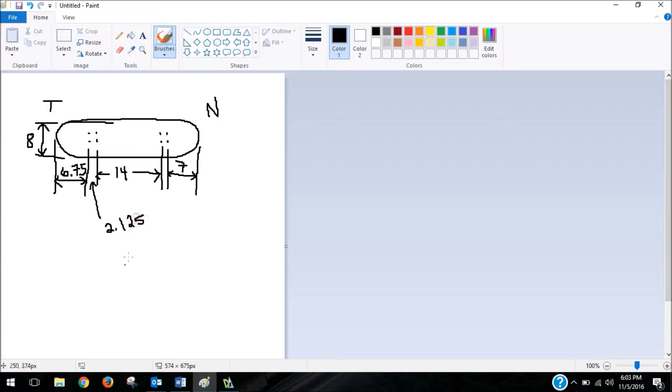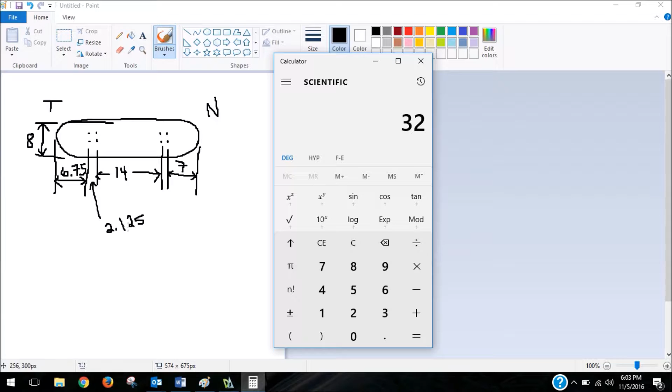2.125. Then I'm going to pull up a calculator and add up 6.75 plus 2.125 plus 14 plus another 2.125 for the other distance between my bolt holes, and finally 7, and it is a very nice number - it is 32 inches long. I'm going to write that down, 32 inches. So our rectangle is going to be 32 by 8 inches.

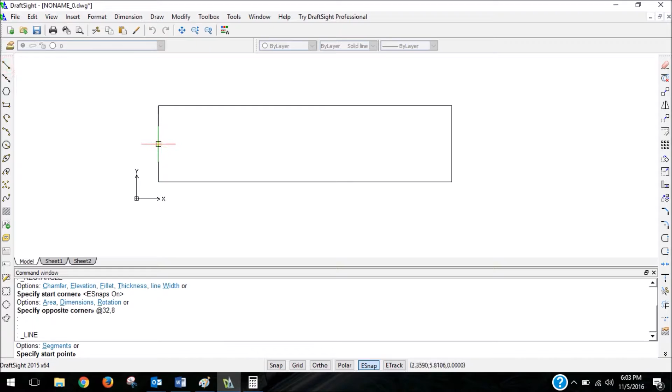Next, I'm going to draw two lines, one that cuts it in half this direction. Actually, I'm only going to draw that one line. I'm not going to draw the second line just yet.

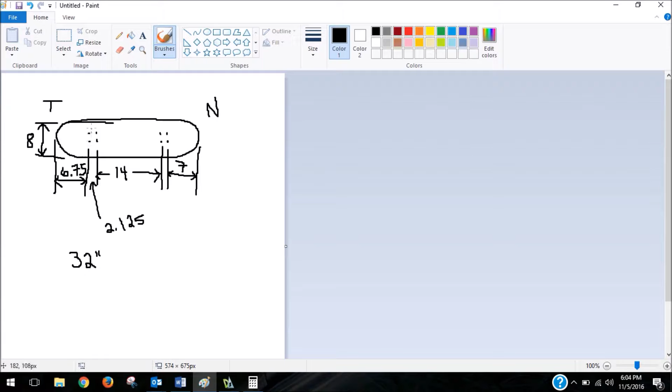So the next thing I'm going to do is draw my nose and my tail line. I have a little T here on the left indicating that my tail is the left side of the board, and an N here on the right indicating that this side is the nose. So if I have a rectangle around this whole thing, I'm going to make a line 6.75 inches away from the left side and 7 inches from the right side.

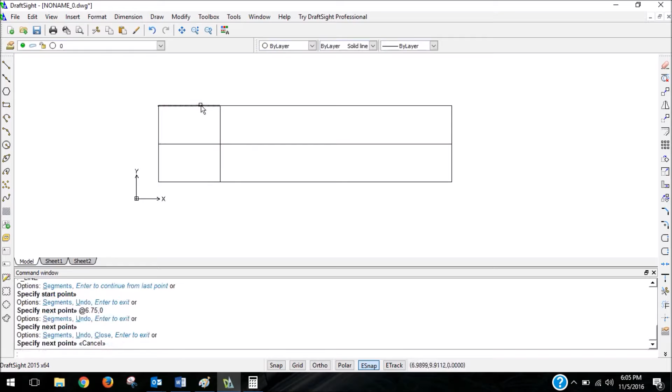So if you notice, the way I got a point that was 6.75 inches away is I drew a line, which I'll later delete, that happened to get me from this point to the point I needed to be at. So I can just click here and delete.

Now the other cool thing that we can do is we only have to worry about drawing half of our skateboard. So from this point, I'm just going to draw in the top half of the large first rectangle I drew, and then later on, once we're done, we're going to mirror it across that middle line I drew.

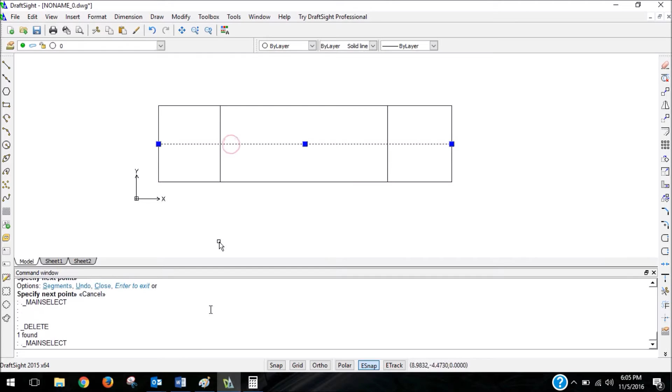Let me go ahead and place my bolt holes now. For this, I'm going to draw some lines, and all these lines I'm drawing that are going to later be deleted, I'll refer to this as reference geometry because it's basically geometry we create in order to create the features we really care about.

And I forgot what the width was, so I have to go and look that up. Oh no, I didn't - okay, it's 1.62. So the width that we're going to be coming up here of our wheelbase, I haven't drawn that on here either, but we happen to know that from the top set of bolt holes to the bottom set of bolt holes is 1.625.

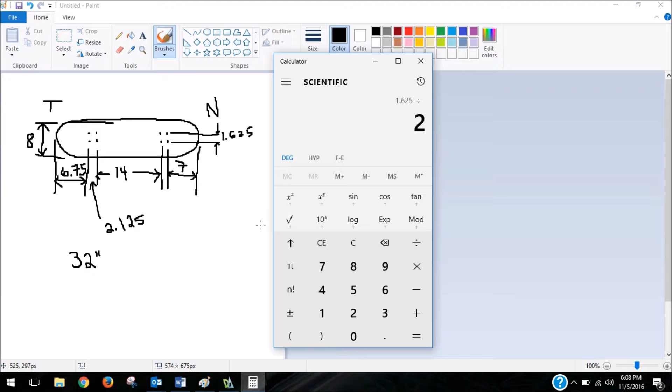So in order to make this feature, we need to then divide that. So 1.625 divided by 2 - we have to half it because our line's going to be coming from the midpoint of those two bolt holes - gives us 0.8125.

So we're going to come 0.8125 up. Oops, so I forgot to put the little @ sign, so we went off to the absolute coordinate, not the relative coordinate.

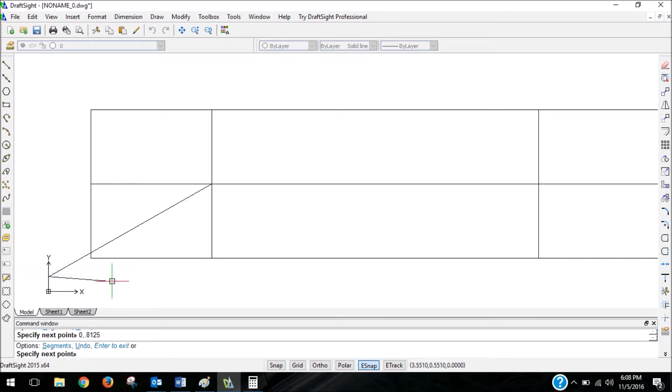Alright, and again, if it's not clear why we didn't go up 1.625 here right now, you'll see that later - when we mirror the board, there's going to be another 0.8125 gap, and when we add those two 0.8125 distances together, we get the 1.625 that we're really looking for.

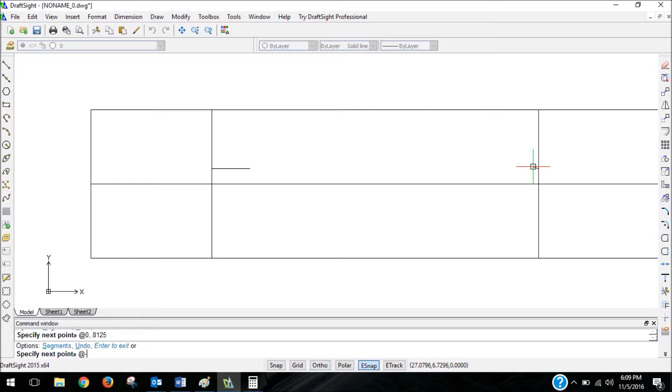I'm going to go over 2.125, and I'm going to do the same thing on this side. And I can position my bolt holes now - these are each 3/16 of an inch in diameter.

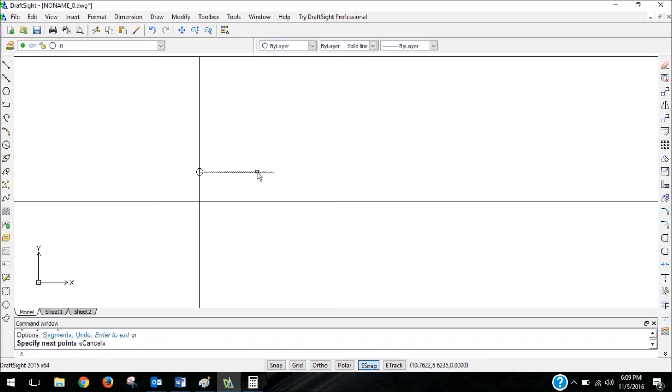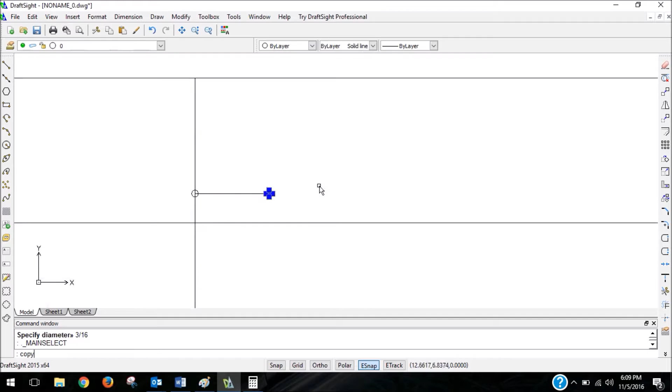And another quick thing we could do is copy paste. So you might not have seen that trick yet. If we just type in copy and I have my item I'd like to copy selected, hit enter. You specify where you're copying it from and where you're going to copy it to.

So if I click the center of my circle as the start point, it's going to basically drag my circle from the center point, and I can position it at these 2 points. And then hit escape. Next, I can delete the reference geometry that I originally had there. So all these little lines.

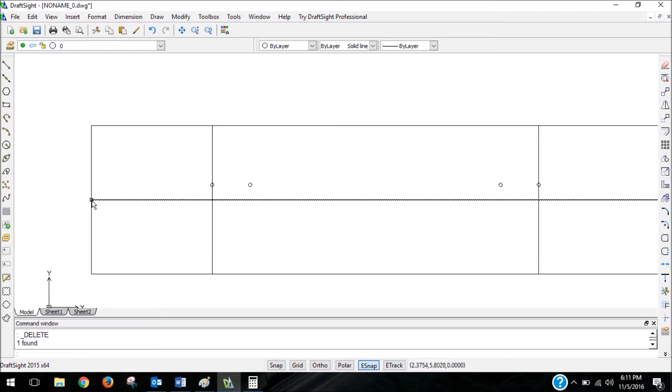And next we just have to make our curves. So just the curved portion of our board, and I'm going to use the spline tool for this. The other important thing is to decide where you want this curve to start and end. It's definitely going to start or end at the point right here, at the midpoint of the left side and the midpoint of the right side for each of our curves.

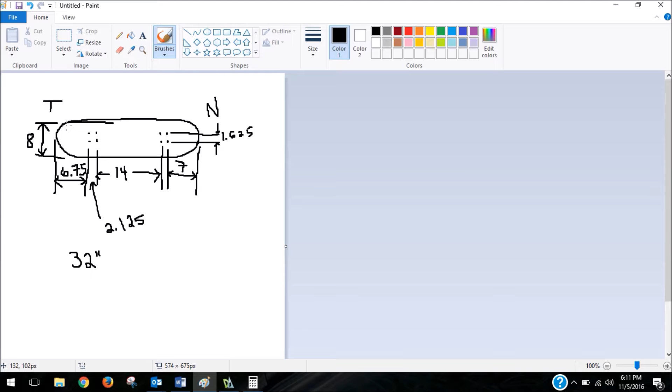But the key is, where do we want this curve to start? And for my case, I'm going to start my curve actually in line with the outer bolt hole in each scenario here. Sometimes you might want to bring the curve in further or have a shorter, more compressed curve. But for right now, I think that putting it at the nose and tail length would be a great spot.

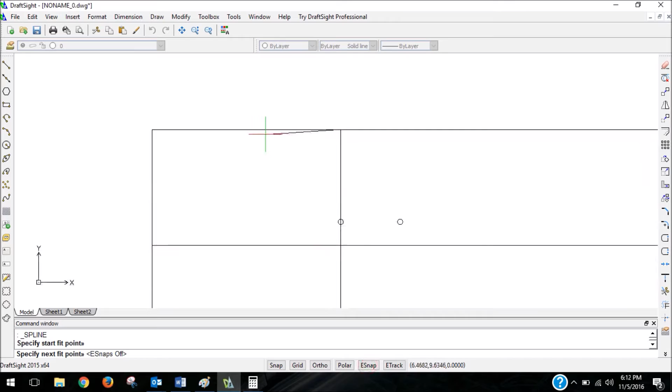So I'm going to put it here to start. I'm going to take off my snap, and I'm going to put down 3 points. And I'm going to change these in a little bit. And I'm going to turn my snap back on and get back to this midpoint. I am going to hit enter to start the tangency.

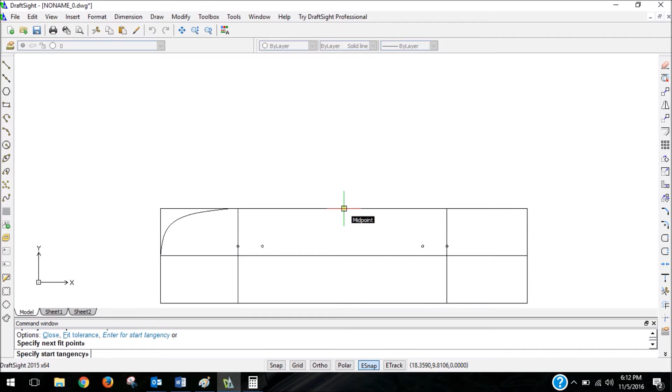And again, if you don't remember how the spline tool works, you could watch the video about creating splines and get some more practice with that before you start making the end of your board. And the start tangency is going to be along the horizontal plane there. And then this is going to be along the vertical axis from this point.

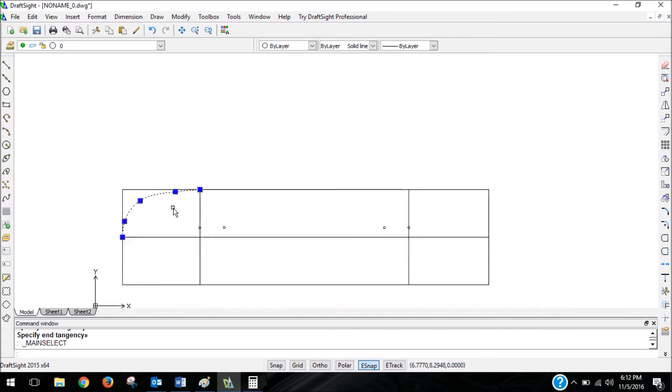So that actually doesn't look like that bad of a shape. Play around with it a little bit. And again, turn off the snap to play around with it. Alright, let's start with that. Now I'm going to make another spline on the other side. And again, we're just making half of the spline because we're going to mirror this geometry onto the other half of the rectangle.

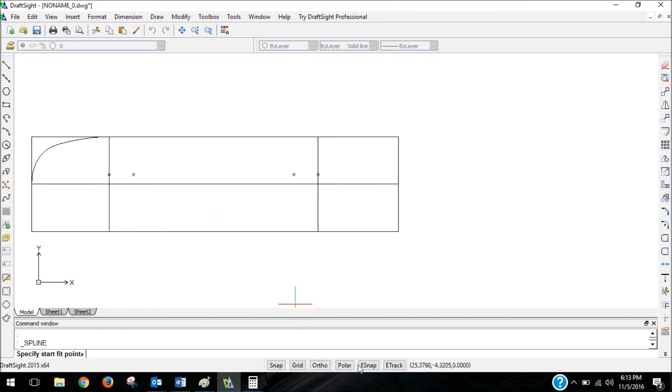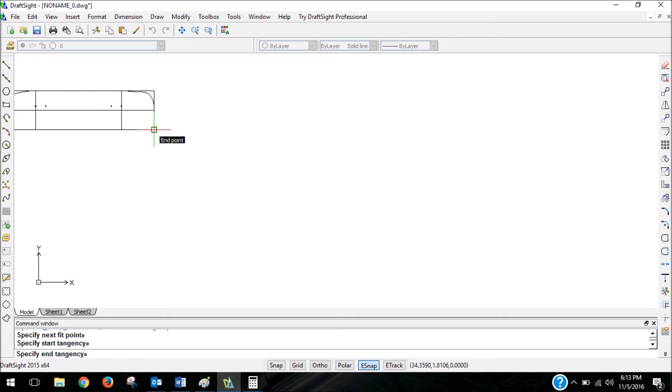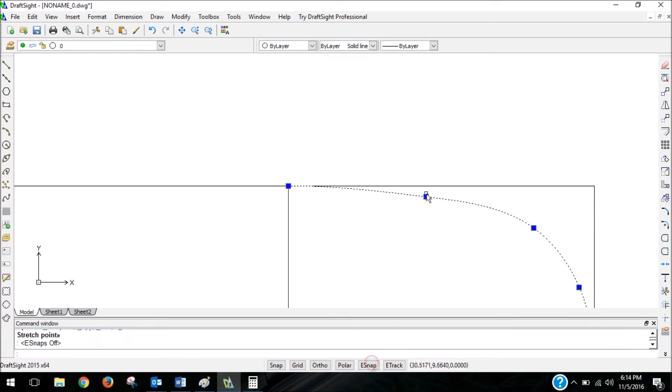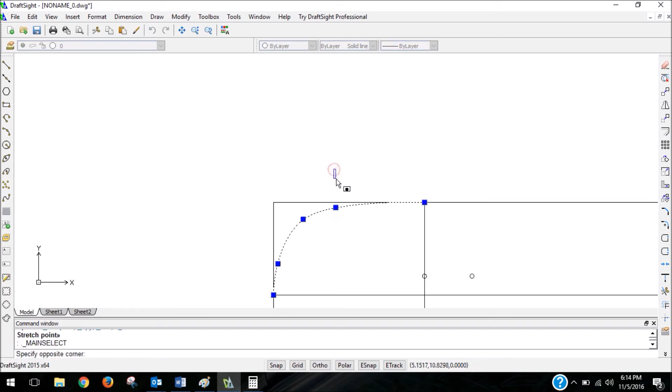And I'm going to follow the same tangencies, both horizontal and vertical. Alright, let me adjust this one a little bit more. Alright, that looks good enough for now for this example.

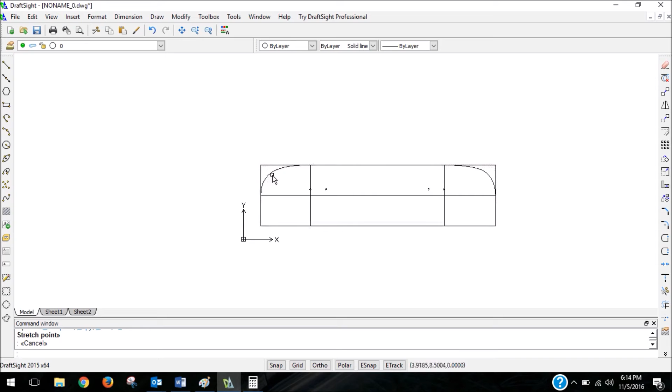So what we can do is select, first let's clean it up and get rid of some of this geometry. So I can delete a bunch of things by clicking and forming one of these selection boxes, coming from the right to the left, and that forms that green box. Notice if I go the other direction it turns blue. Anything that touches this green box or is inside of it will get deleted. The blue is anything that's completely enclosed in the box gets deleted.

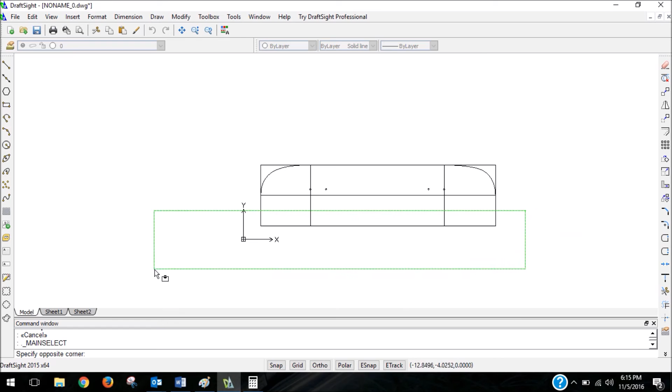So this is just going to select all the lines that pass through this, which I can delete. And it deleted part of our board. I'll just create a new line to replace that missing line. And now I can create a box that will select everything, and then I'm going to deselect this horizontal line. The way I do that is I hold down Shift and click on that line.

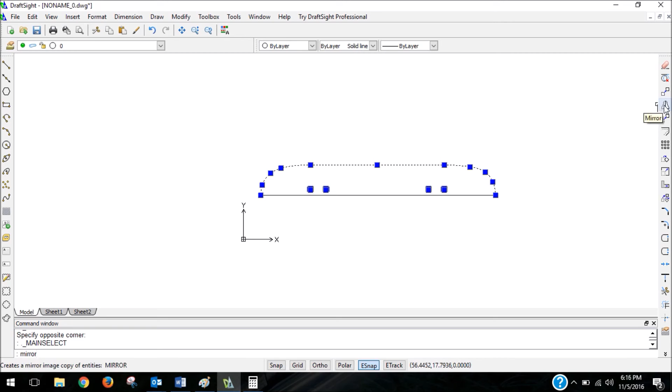That will deselect it. I'm going to type in mirror. There's also a little icon off to the side here on the right side for mirroring. I'm used to typing this in. Hit enter, and it's going to ask us to define our mirror axis. So the axis is defined by a line that we create, and that line happens to be this horizontal line. So we just choose the start point and the end point of that line.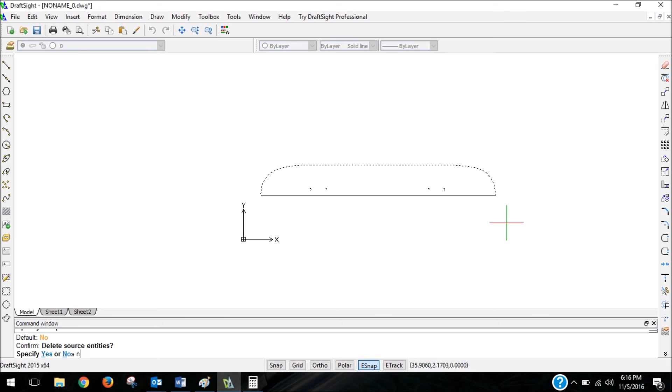So I click on the start point first, and then again, if you look at the command window, it prompts me to specify the end point. So I'm going to select the end point of that line. Delete source entities is what it's asking me in the command window. I do not want to delete the original thing I selected. If I did that, I would just be left with the other half. So I want to keep both halves to make it a whole. So I'm going to type N for no, because N is underlined in that yes or no prompt.

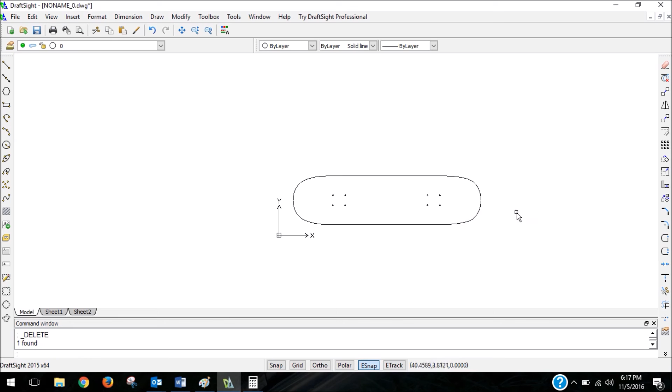And I can delete this, and I have my board. And that's it. If your board is fully symmetrical, so not just symmetrical from top to bottom, but also side to side, where your nose and your tail are the same, you could actually get away with just making a quarter of your board, and mirroring it first about the horizontal axis, and then mirroring it again about a vertical axis. But that's really it.